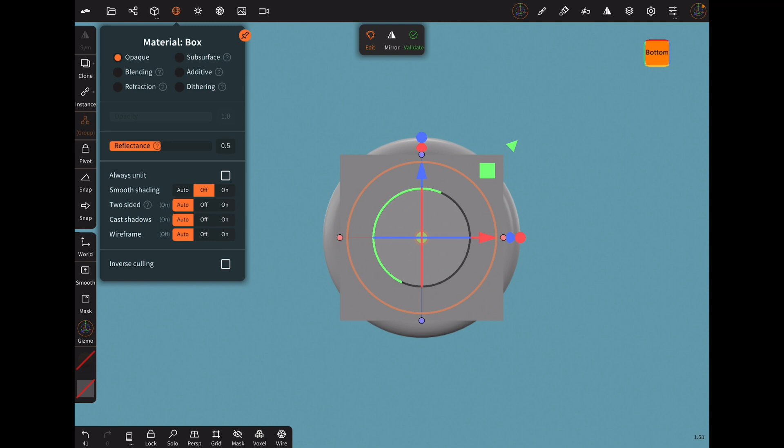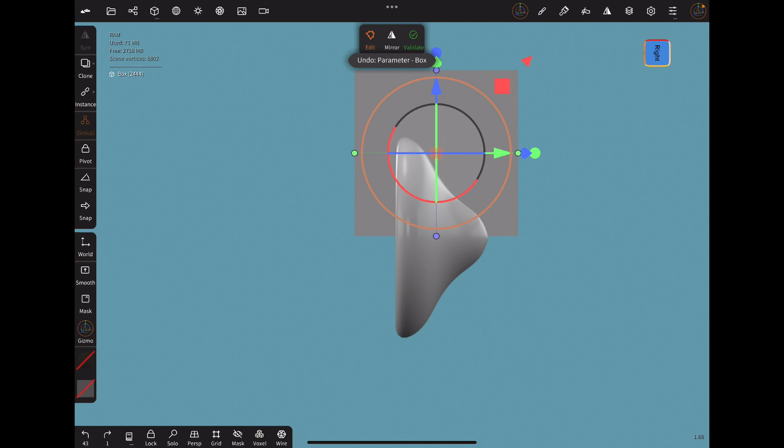I will add a box to the scene. I will now, in the material menu, turn off the smooth shading for this and manipulate the shape so that I have one small rectangle that is just inside my inner head of my mushroom. To do so, you will need to grab the small points of the gizmo tool and manipulate your shape with this.

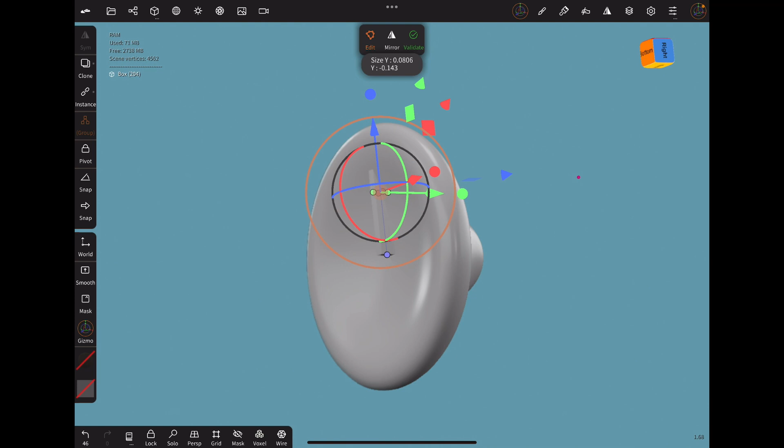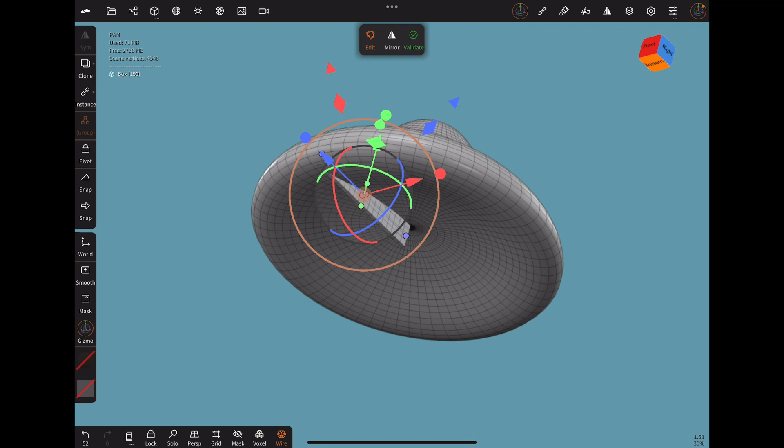So I think we're getting somewhere there. Now we want to look at our topology, and I think there are too many polygons for this rectangle, so I will go to the primitives menu and lower the divisions in the Z axis. Okay, I think this looks good.

Now I will validate this. So to make things easier, I will go and color my shapes so we can better see what's going on. I will take a reddish color for the head, and a yellow color, not much saturation, for the lamelles.

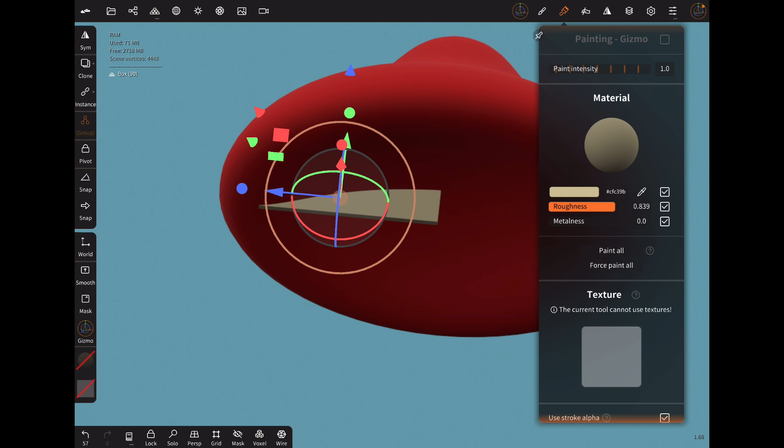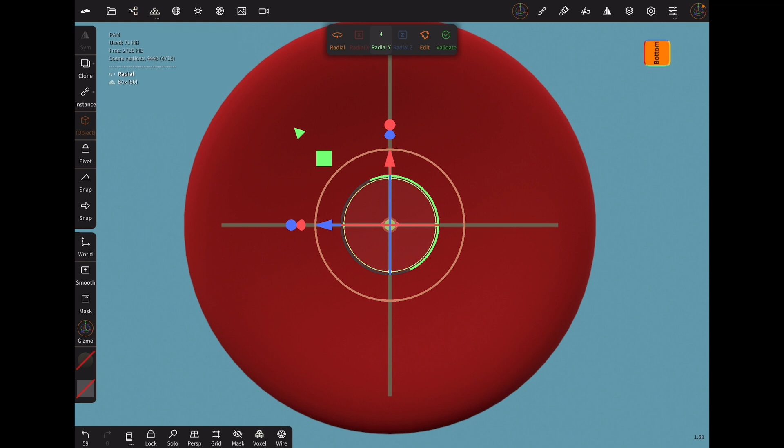Okay, now we need lots of these lamelles. We'll make it a little smaller again. So I will add a radial repeater, and you instantly see that our box is repeated 4 times in the y-axis. So I will increase this number to the highest it goes, and validate this.

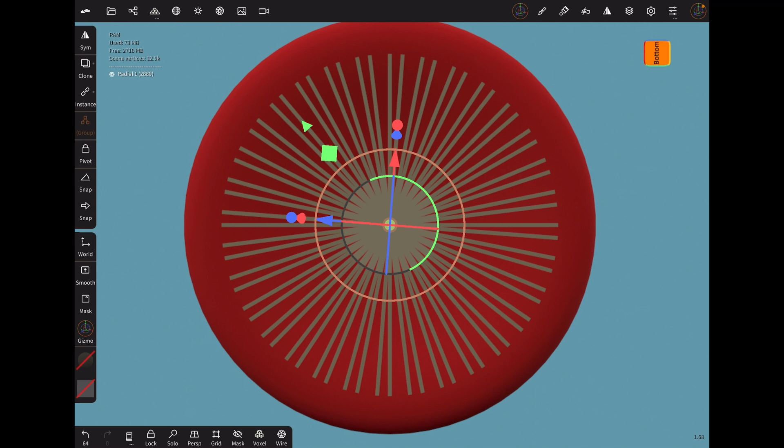So now I go to the scene menu and clone my lamelles two times. I will select the first clone, rotate it a small amount. We'll take the second clone, rotate it again. Like this. Now you see we have lots of lamelles. So I will join them all together. And that's it - that's the head of our mushroom.

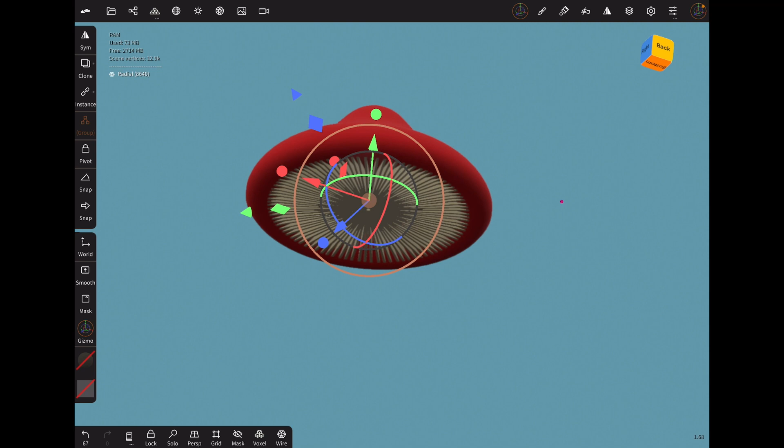So now it looks a little symmetrical and not much organic. To change that, we go join the head and the lamelles together in the scene menu. And now we want to grab our move tool, turn symmetry off, lower the intensity, and make sure we have connected topology turned off.

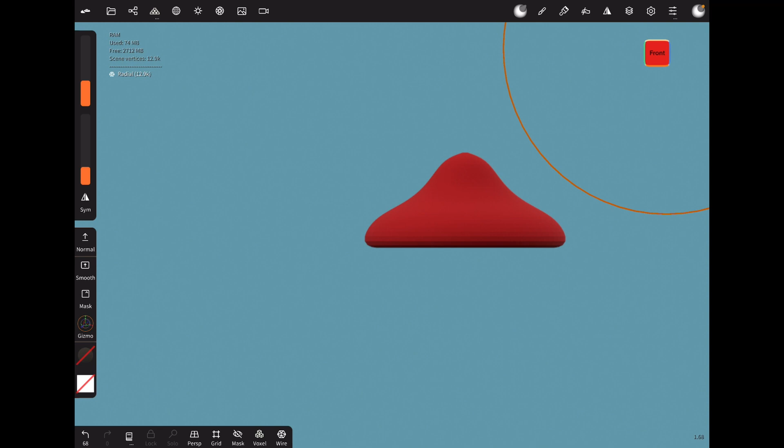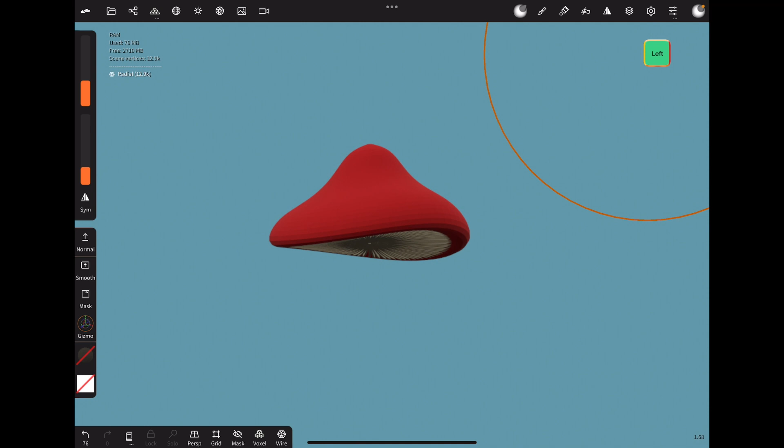You can find this in the stroke menu. I will rotate to my front view and start to manipulate this shape a little. What this does, if you uncheck connected topology, is that you also move the lamelles with your moving of the head. So now I'm able to get a bit of an organic feel to my mushroom. I think I like this.

And I will go to the scene menu and separate them again. So now we have separated every lamelle. That's not what we want - we want the lamelles to keep together.

So I will name this head, and I will go and join all these lamelles again, and also name them lamelle. Most of the time I don't name my shapes, but every time I think I need to, to keep a better overview of what's going on. So let's do this.

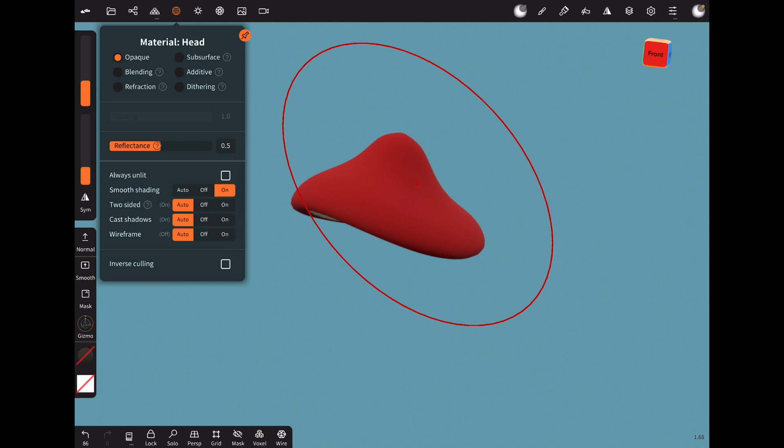And now we can also go back to the material menu for the head and turn smooth shading on. Let's smooth the head a little. Okay, I think this already looks pretty good.

Now, what to do next? In the next step, we want to go to our tube tool, select the curve, lock the front view, and make our bottom part for our mushroom. To do so, I will activate 2 radius points, make the bottom point really big and the top point a little smaller. Also activate spline, get 1 point near the bottom point to get a straight line in the bottom end, and make a little curve here.

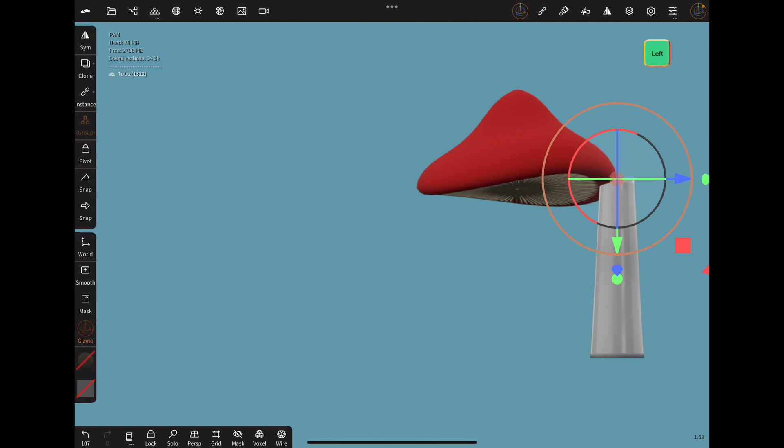Also do 1 point near the top point to get a straight line, and this will be the base of our mushroom. So we can validate this now. Let's turn to the side view, activate our gizmo tool, and move it to the middle of our head.

Also take a look from the bottom. It's really in the middle. I think this looks fine. Right, now we got a basic mushroom right now.

Pretty easy, pretty fast. I will go and color our mushroom base in a whitish color.

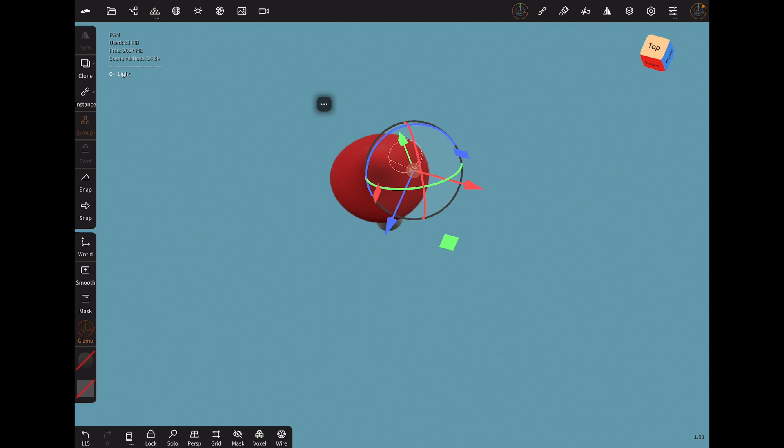To give it a better look I will now go to add my first light. I will choose a spotlight. Let's zoom a little out, and this light should hit the top of the mushroom's head. So I rotate it in the way I need it.

And now we go to adjust the color. I like a warm color for my first spotlight, and the intensity needs to be increased. Also the cone angle needs to get a lot bigger. So this looks fine, I think.

And also we will add a second light, also a spotlight. The color not too warm but also not too cold. And with this light, spotlight, we will make a rim light.

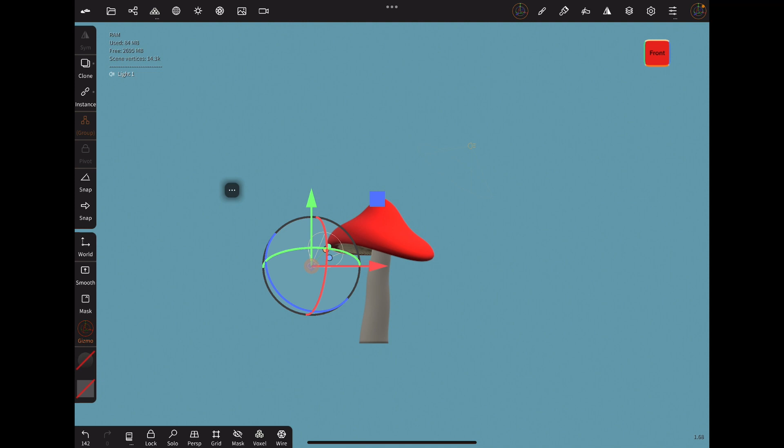So this light should hit our mushroom from the back side to give us a nice light edge. You will see what I mean. And here you go and increase the intensity a lot, and you go for something that hits the edge of your mushroom. Increase the cone angle, and instantly you see the edge coming to your mushroom and give it a more natural, live looking look.

Okay, this should it be for the lighting at the moment. So the next thing we want to do is the downer part of the mushroom. I don't know how it's called in English, but you will see what I mean when we do it.

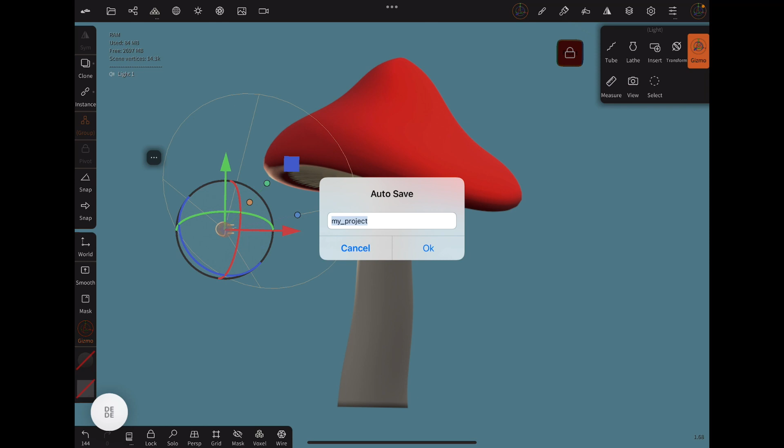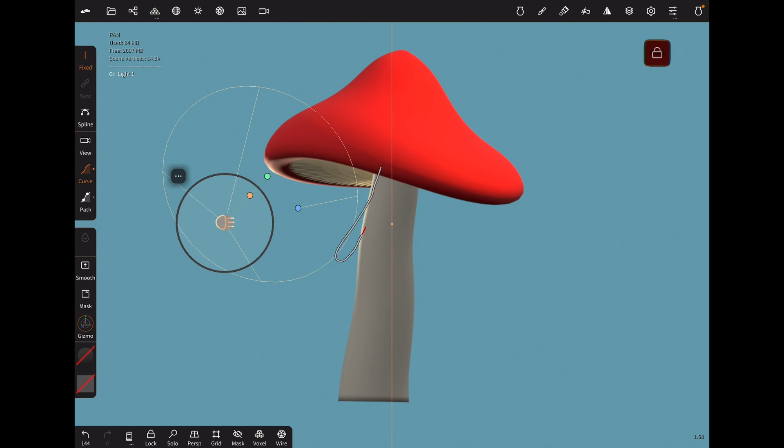So we grab our front view, again lock it, choose our lathe tool, the curve, and start by centering this middle line of the lathe tool with our base shape, and draw a shape like this. Again, use the spline, get as few points as you need.

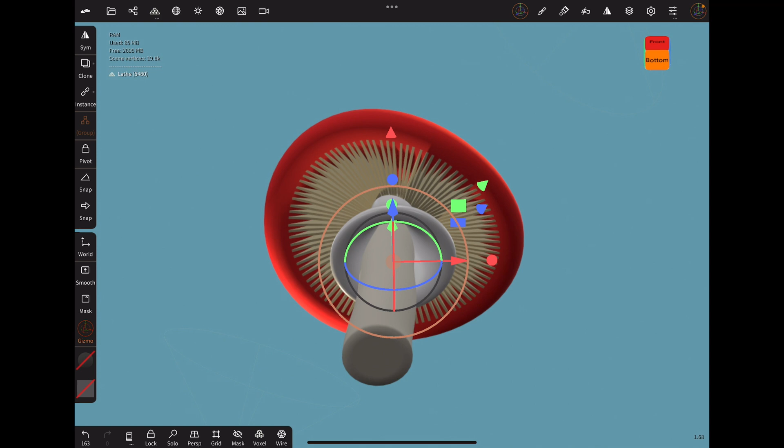Okay, I think this looks fine. Validate this. So now you need to center your shape to your mushroom's base. This looks good.

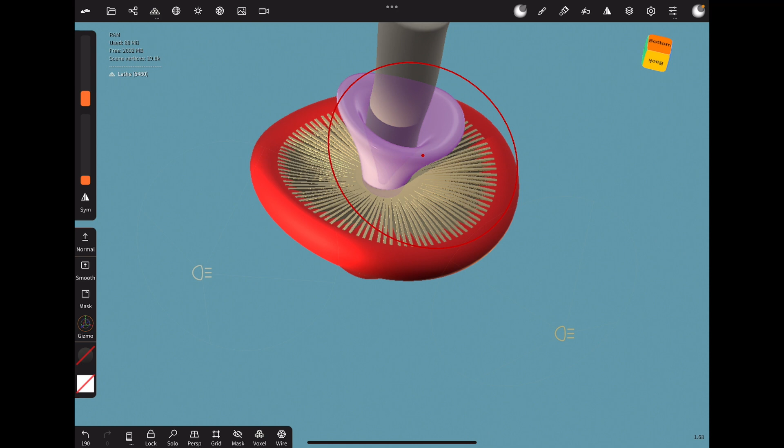Now you go with your move tool again and try to get this shape a little bit more organic. Also look that the shape is really covering the base of your mushroom. Accidentally activate the lamelles. So if you do something like this, it's always good to activate the shape you want to work with and to lock the shape, so you can't accidentally choose another shape and do some adjustments you don't want to do.

So I think this looks already cool. Now to get more folds in, we need to subdivide it twice to get more polygons here to work with. Then we will use the mask tool, and with a simple click in the viewport you can unmask all, mask all, and now you can switch your mask tool to unmask with a small radius and draw a line like this.

Make sure this line is following your shape to get it more realistic, and make sure this mask is thinner at the top and thicker at the bottom. Now go to the setting mask menu, blur it sometimes, invert your mask, blur again, invert your mask. This is the mask that we want.

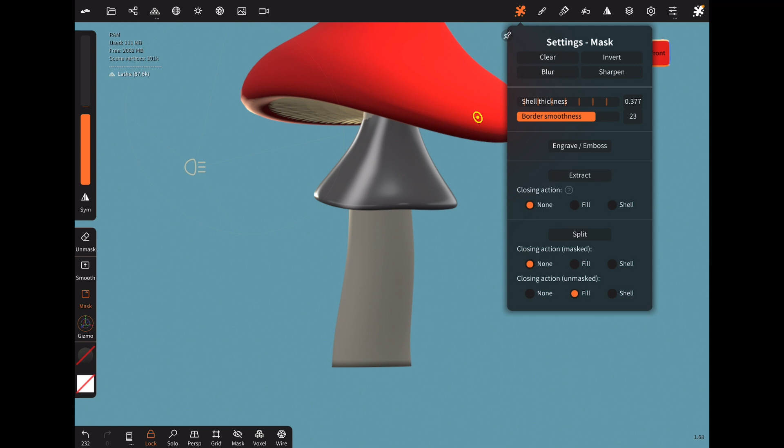Now get the move tool and start moving this shape out, like this. I think this looks fine.

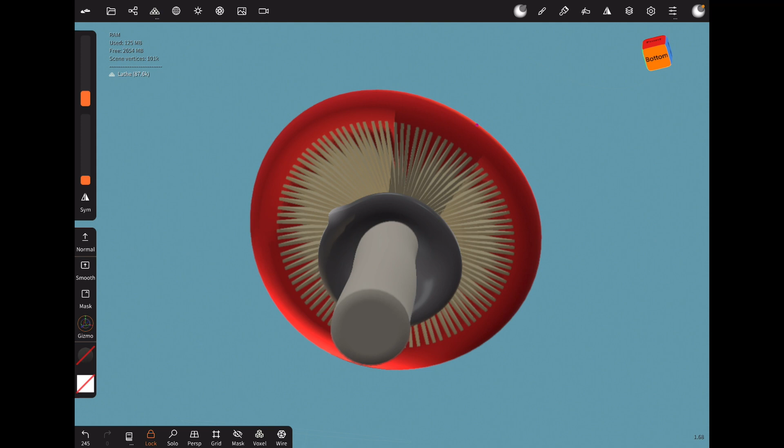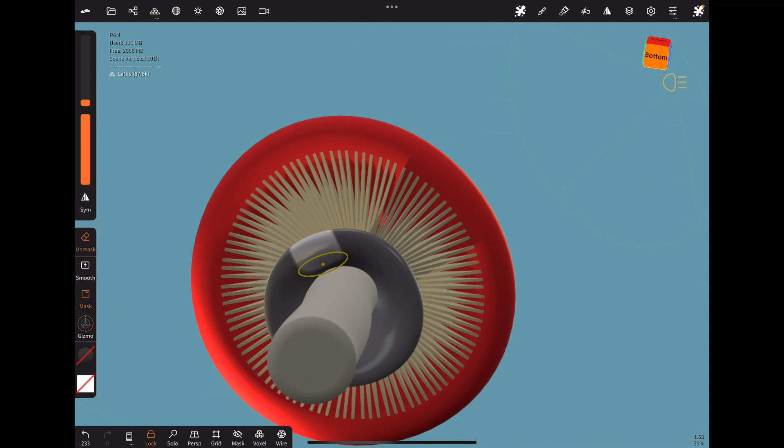So to get it even more realistic, we can take a few steps back, go back to our mask, and also put him there, and also unmask a part in the inner. Again, blur it, invert, blur it, invert.

Choose your move tool. Yeah, this looks a little better. And every time you do something like this, take your time, not like me in this tutorial now, to get it perfectly looking the way you want it to look. Clear your mask and repeat this step.

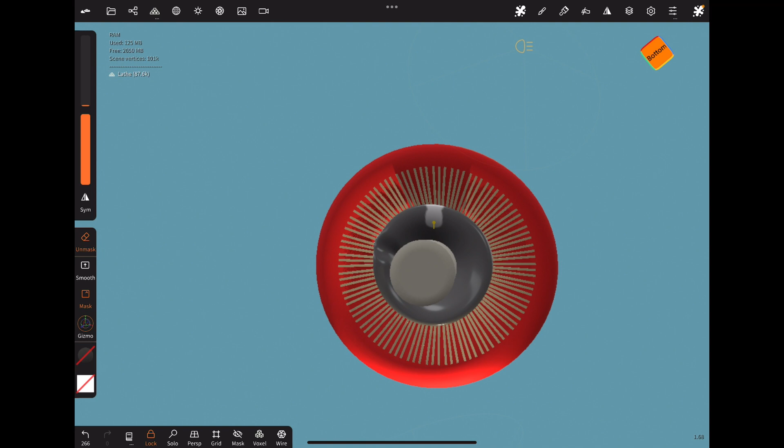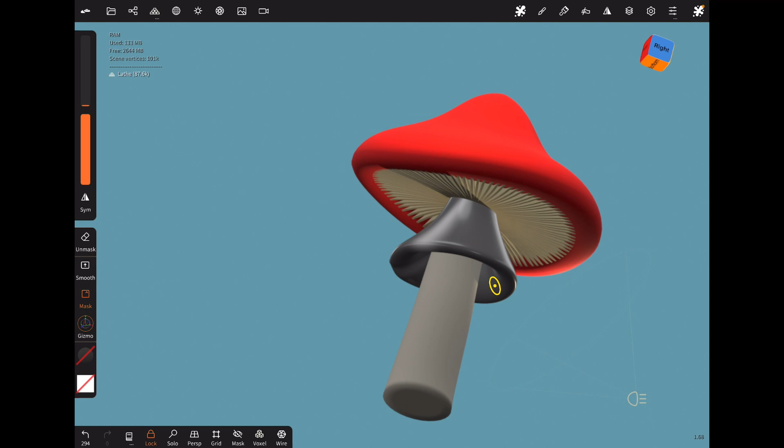Again, blur it, invert, blur, invert. And to do this, you need to make sure you have not too many polygons and not too few. In this case, I think I can work with less polygons, but it still works with that amount, so there's no problem. And you already see it starts to look more realistic and more organic. So I will leave it that way.

Unmask everything. At the top there's a little error I see, so select the move tool, move this a bit out. Okay, this is looking good.

I will color this part also in with a more yellowish color. And we are good to go. So now some final touches I like to do.

I like to activate the head, also subdivide it sometimes, because now we want to go and make some paint on it. I think maybe this is enough, we will test it.

So to do the points of the Toadstool, we need to activate our paint tool. We go here to the alpha, we need no alpha, so you need to activate the first square here.

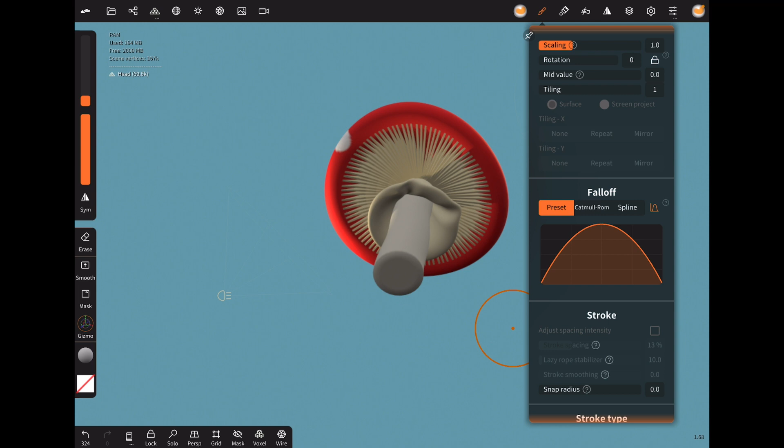For more realistic results, we will now go back to the preset, fall off, activate dot, sample the color of our lamelles, lower the intensity of a brush, and paint the inside of our head with this color.

Go some times over it till you feel it looks good. Okay, I think this will work.

And now we go and activate the subsurface scattering for this mushroom. In this case, I like to simulate the color of our main light, so a warm orange tone. Set the depth to a point you like it. I think this looks good.

Also activate the subsurface material for the lamelles. At instant they look much more realistic.

So you can also go and increase the subdivisions, but if you do it just by subdividing, you will see they get very roundish. Maybe it looks good, maybe not. I like to activate the linear subdivision for the first subdivide, then deactivate it and subdivide again.